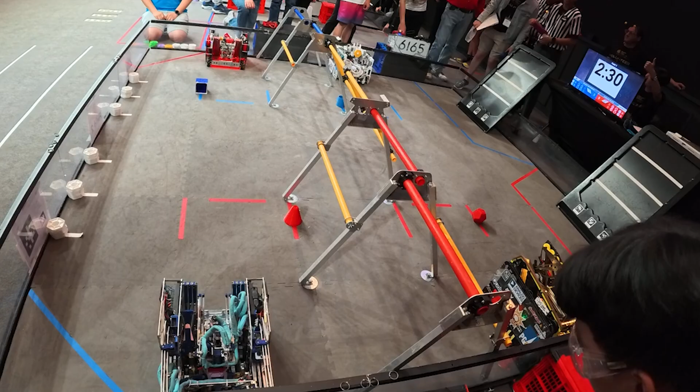So what is PurePursuit? It's a path-following algorithm, such as Roadrunner, that basically takes your current robot's position plus the path you want it to follow and converts that into movement vectors that the robot should follow.

There are a few other different path-following algorithms that are commonly used, the most common being Roadrunner, and also PID to point, and finally PurePursuit. There also exist many various custom implementations that are less commonly used.

Some advantages of PurePursuit include that it is very robust because it calculates its movement live during each cycle while the robot is moving. This means that if the robot strays from its original path, it can correct for it immediately.

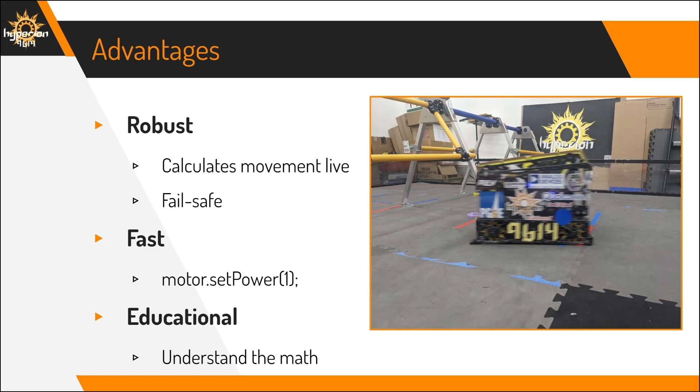However, PurePursuit also comes with some downsides. It is quite difficult to use because there are no optimal existing libraries.

You'll have to figure out how to make your own PurePursuit based on the actual geometry. Then you'll have to write a lot of custom code to make the PurePursuit run well and be easy to use. Also, because it calculates its motor powers live, it can be unpredictable sometimes, so it'll move slightly differently.

So how does PurePursuit work? First, you draw a circle around the robot's current position. Then you have the paths that you pre-tuned for your autonomous that you want the robot to follow. These can usually be lines, or they can also be different curves depending on your needs.

Then you find the intersection between the circle and the path, which is called the follow point. Finally, you make the robot drive towards that follow point every loop, which means that the follow point will gradually move along the path and the robot will always keep following that follow point.

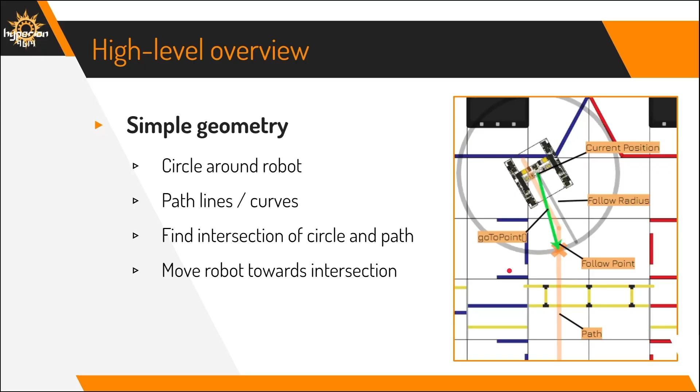So to make your own PurePursuit implementation, here are some good resources. First, you should watch Gluten Free's video series, titled FTC Programming PurePursuit Tutorial. This includes a lot of the base structure of PurePursuit, and some of the code can be directly copied, but of course there's going to be a lot of custom adjustments that you'll have to make.

The base code may contain errors that you might need to fix. In addition, this video series gives you a good intuition of how PurePursuit works and also gives a few ideas for how you can improve it.

In order for you to know where the robot is on the field, you'll need a localizer. Basically, a localizer takes your odometry inputs and converts them into robot coordinates based on where you started the robot. It's recommended to use a pre-made localizer because the math is pretty complicated, and all the math for a custom localizer would pretty much be the same anyway.

So you should plug in the localizer coordinates, which it spits out directly into the PurePursuit, as your current robot position.

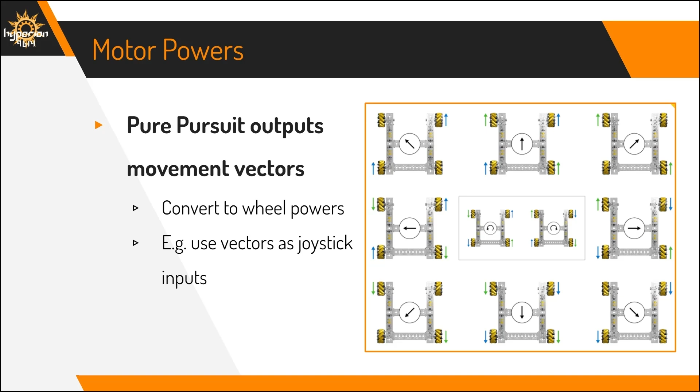PurePursuit only outputs movement vectors, meaning it effectively gives you a single arrow of which direction the robot should move relative to itself. However, the robot needs to drive using wheels, so you'll need to convert the single movement vector into each of the 4 wheels' powers. This can be done using a simple mecanum drivetrain code, which converts the movement vector, usually represented as a joystick input, into wheel powers.

Here are some common problems you might see while making your own PurePursuit program. First, the robot doesn't move in the correct direction. This is often a result of incorrect coordinate system conversions, especially between the localizer and the PurePursuit program, so definitely check that. Furthermore, X and Y directions, or forward and strafe directions, may also be incorrect and need to be correctly identified to run the program.

Finally, some of the geometry might be incorrect, so check through all of it and debug it, making sure the follow point is being calculated correctly, as well as the wheel powers.

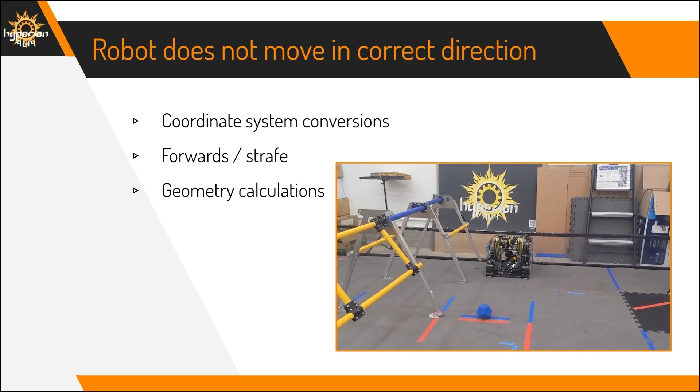Another common problem is that the robot gets stuck and oscillates. This is because when the robot is somewhere in the middle of the path, it will often have 2 intersections with the path, so the robot chooses the incorrect intersection to follow. You'll need to figure out which intersection is the correct one and follow only that one.

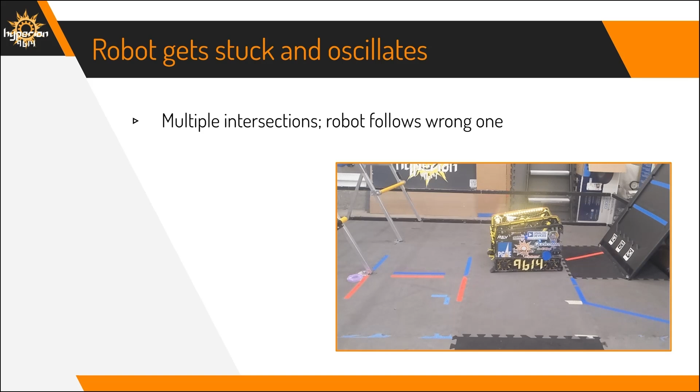Another problem is that the robot overshoots excessively. To fix this, you'll have to increase the follow radius, which smooths the path more aggressively, meaning that around sharp corners the robot will take a smoother path.

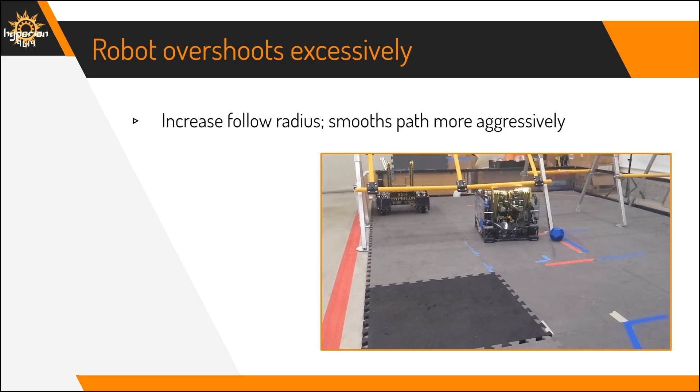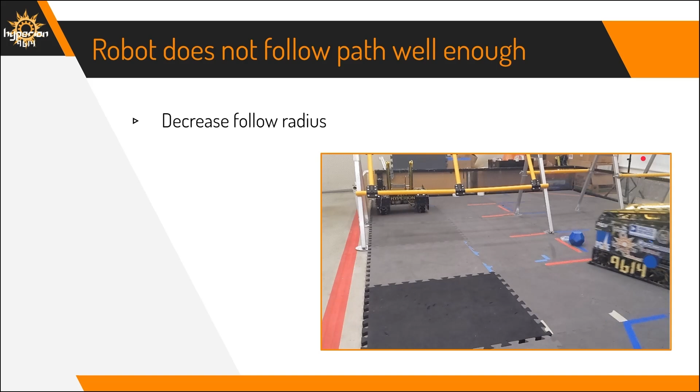One more problem is that the robot does not follow the path well enough. To fix this, decrease the follow radius so the robot follows the path more closely. If you don't, the robot will cut a lot of corners and will probably hit a lot of obstacles.

Now let's look at some features we can add to aid development with this algorithm and extend its functionality. A dynamic follow radius helps solve the last 2 problems. At high speed, it's better for the path to be smoother because fine corrections can't be applied as well, whereas at slow speeds it's often intended for the robot to follow the given path more precisely. By defining the follow radius as a function of speed, we can meet those 2 requirements.

We found that a lot of time during our tuning process was spent waiting for our code to compile and launch on the robot controller. By loading our paths in from files during initialization instead of hard coding them, we're able to make changes much faster.

Creating a path editor helps make edits and tweaks easier. Instead of guesstimating coordinates, you can see the whole path on the field at once. The editor reads your path configurations and plots them on an image of the field. You can also implement PurePursuit in the path editor to estimate what path the robot will actually take on the field.

When the robot is following curved paths, it tends to overshoot due to the momentum the robot has. Tweaking the motor powers to move further inwards on the curve allows the robot to follow paths more nicely. Wolfpack Machina's movement breakdown video from the Power Play season explains this in further detail.

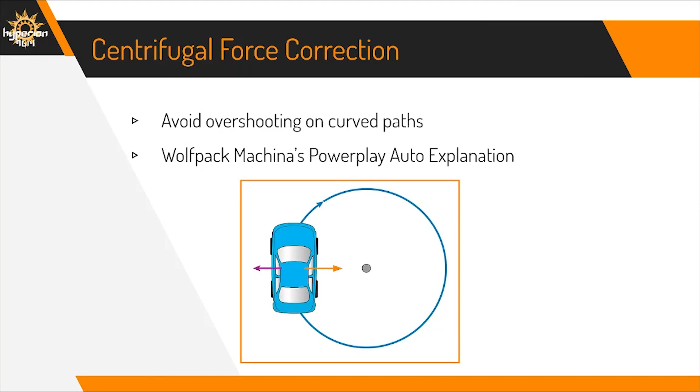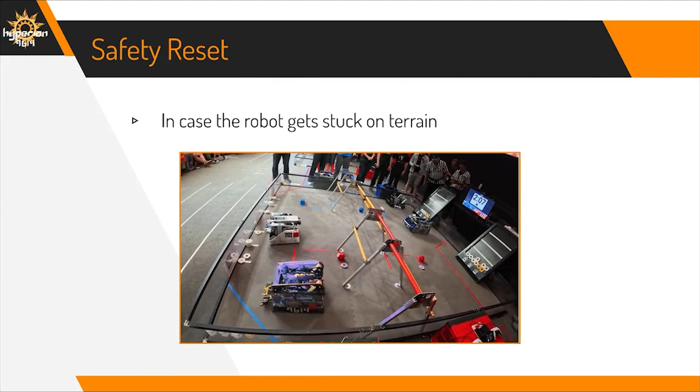You can add backup paths for recovering from mistakes. If the robot gets stuck on terrain, a safety reset path can help the robot back up to a safe position before resuming the previous path. Although preventing terrain collisions entirely would be ideal, this handles the rare cases where something goes wrong and allows achieving a higher autonomous score than without backup paths.